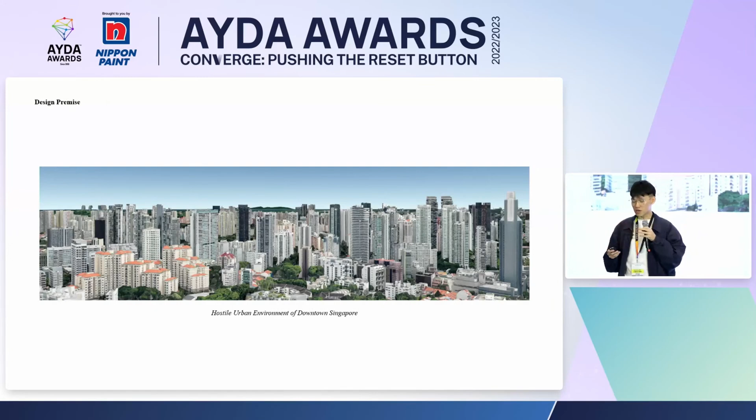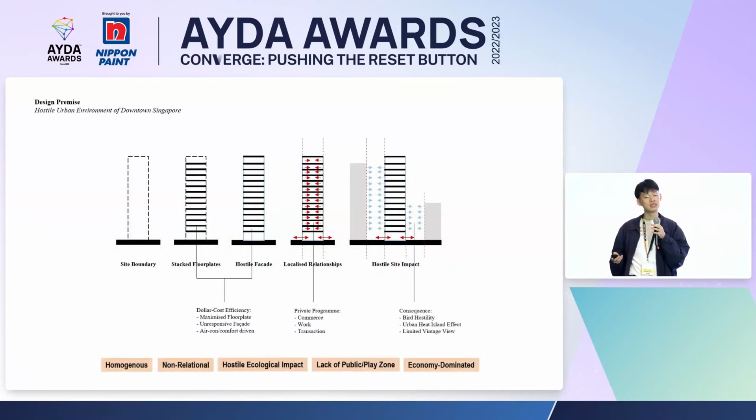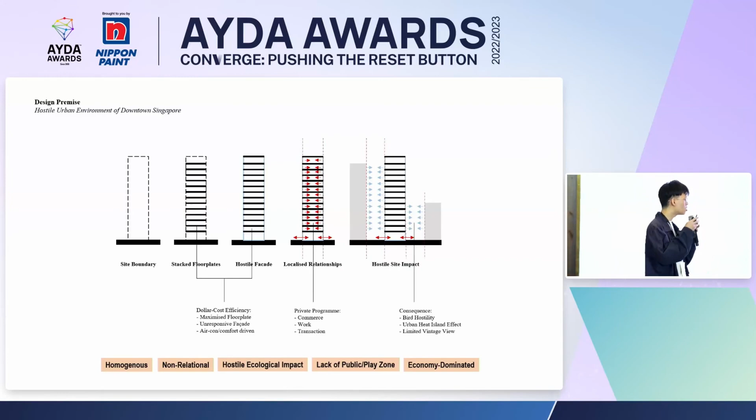In Singapore, the effects of rapid urbanization are very prominent. This project opposes the increasingly hostile urban environment of downtown Singapore, where transactions and work dominate as the anchor programs of our city landscapes. Usually, towers are designed for dollar cost efficiency by maximizing floor plates, resulting in a homogeneous, non-relational situation, a hostile facade causing ecological impacts, and a lack of public zones.

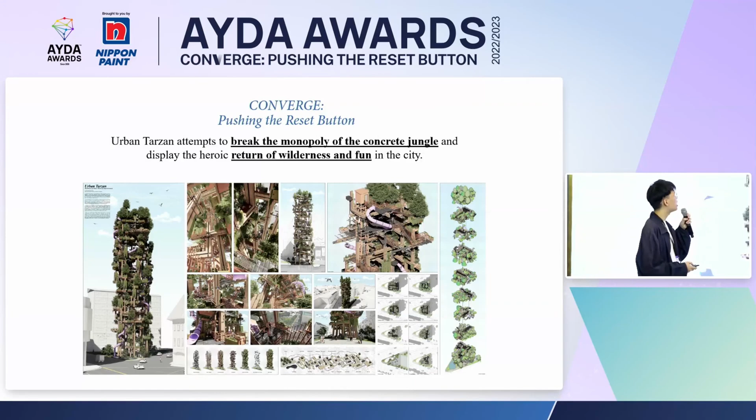My project, titled Urban Tarzan, attempts to break the monopoly of the concrete jungle and display the heroic return of wilderness and fun in the city. For context, the project is located in a cultural/commercial district of around 124 square meters, the size of 1.5 badminton courts, technically less than half the size of this room.

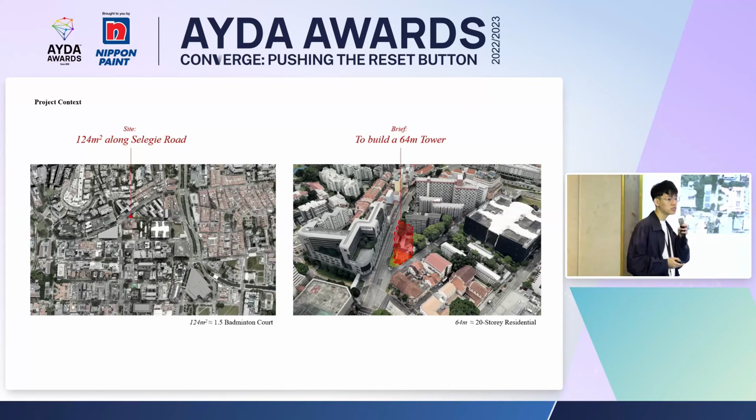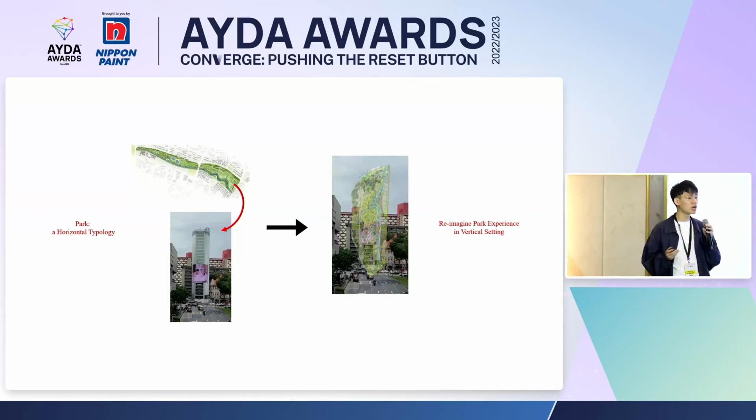The project is to build a 64-meter tower. Urban Tarzan also challenges the park typology, which is usually flat ground on the ground floor, into a vertical setting where we can reimagine park experiences, bringing wilderness, bionomics, and freshness into the urbanscape.

So what actually constitutes designing a nature park? I did a case study of one of Singapore's nature parks and summarized it into three key categories: the ecological system, climate response, and trail creation.

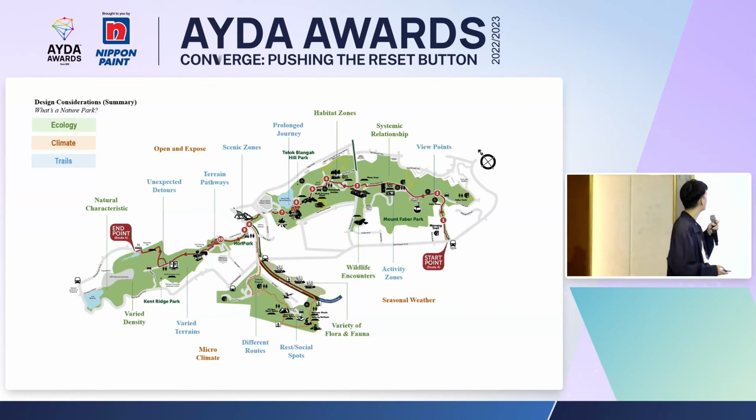The final iteration was chosen because of its spatial provision, structural efficiency, and emulation of nature.

Once the form was decided, I went through an iterative, constant feedback loop where I turned the form into a structure, into space with circulation, and a program. Every time a single change is made, it goes back right to the start to ensure the entire design flow develops throughout.

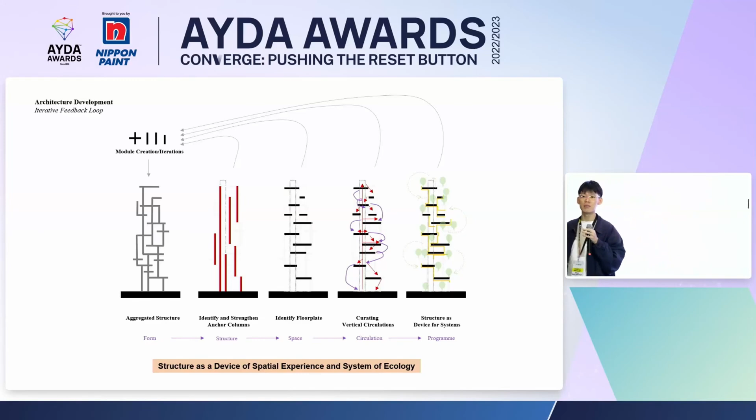This turns columns, which seem to just be a structural element, into a device of spatial experience and a system of ecology. A 1:50 model was made to test the physics and practicality of the building, to see if it actually stands.

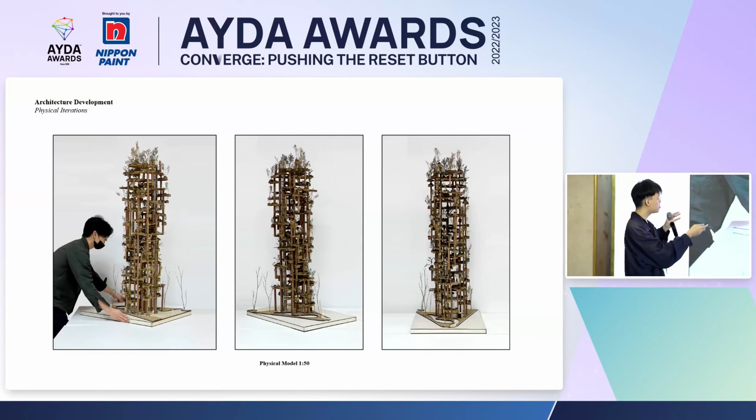When building this model, I had a lot of difficulty because every single time I tried to put in something or glue something, the whole thing might just topple over. This whole process of making the model took more than two weeks.

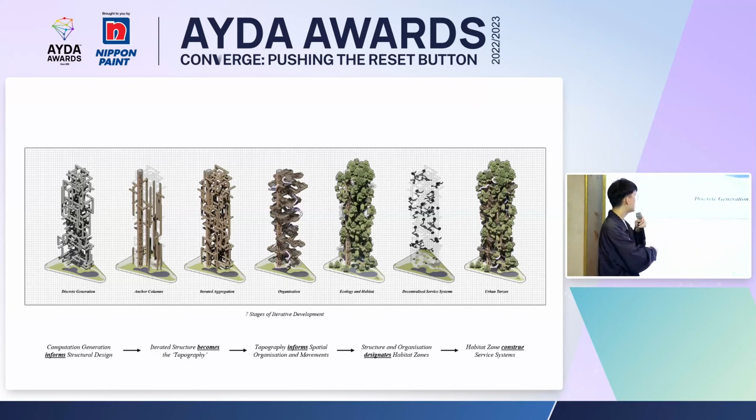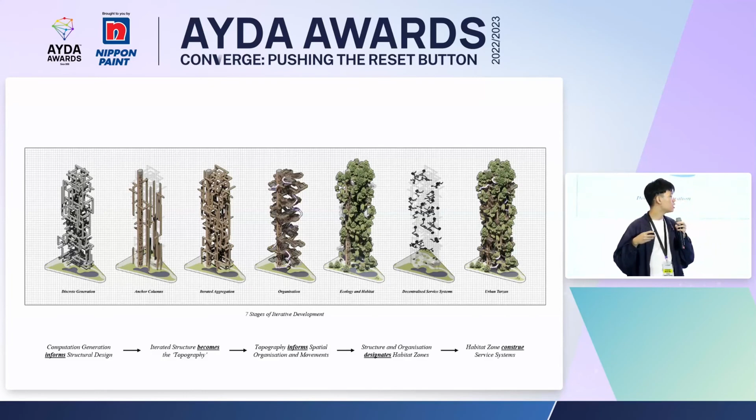In summary, these seven diagrams show the design stages where the computation generation informs the structural design. The iterated structure becomes the topography, and like a real park, the topography informs the organization and movement of the routes, which influences the designation of habitat zones and the construct of the service systems.

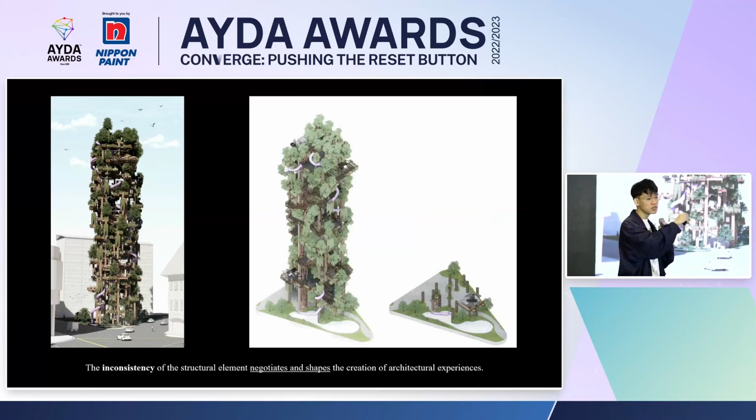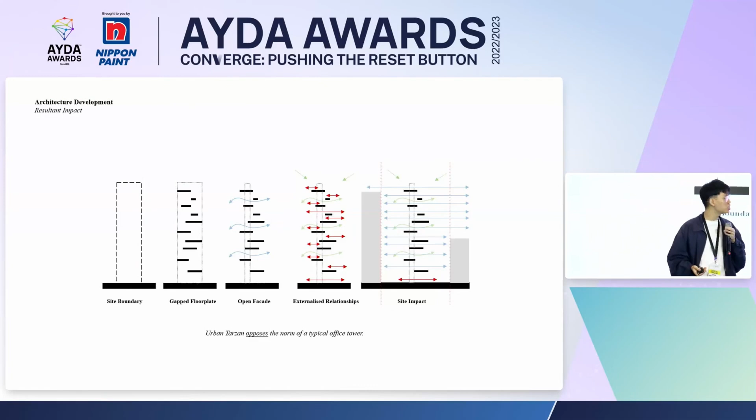A few analyses and studies were conducted, such as the volumetric climate study, where the volume of the site is broken down into 1 meter square cells each to understand where the better spaces are put in functions of programs. Circulation typologies and vantage points were also studied to understand how we can curate the spaces within Urban Tarzan.

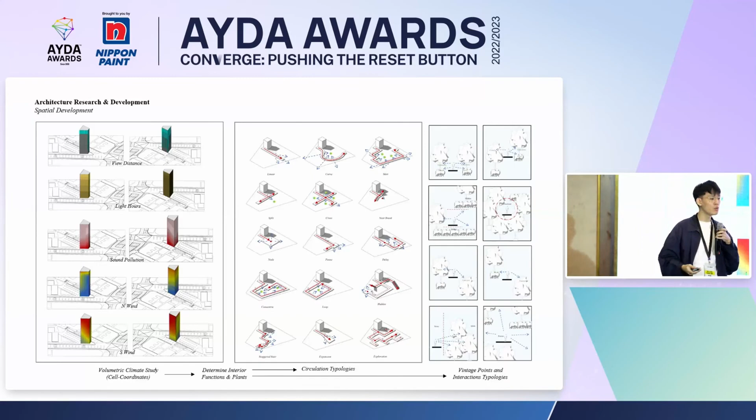Singapore also has a lot of migratory birds that transit through the city throughout different seasons. Most of us do not know that there are actually a lot of bird collisions in our downtown city because of the hostile facade, the glass facade - the birds can't tell where they are flying, and sometimes you'll just see dead birds lying on the floor. This gave me inspiration to create this oasis for them.

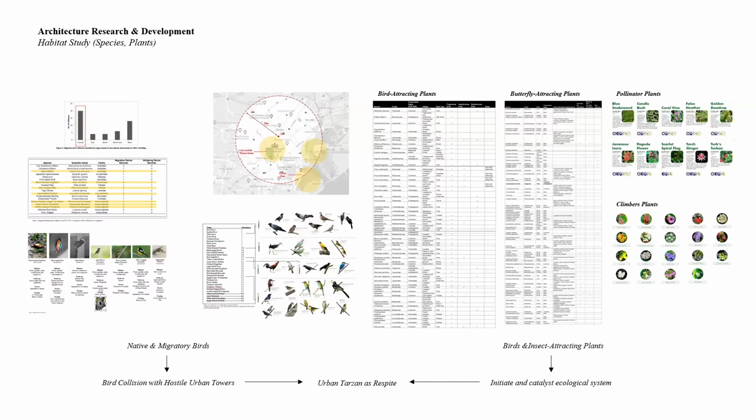Birds and insect attracting plants were also studied and selected, where this initiates and catalyzes an ecological system in hope that Urban Tarzan can become a respite for them.

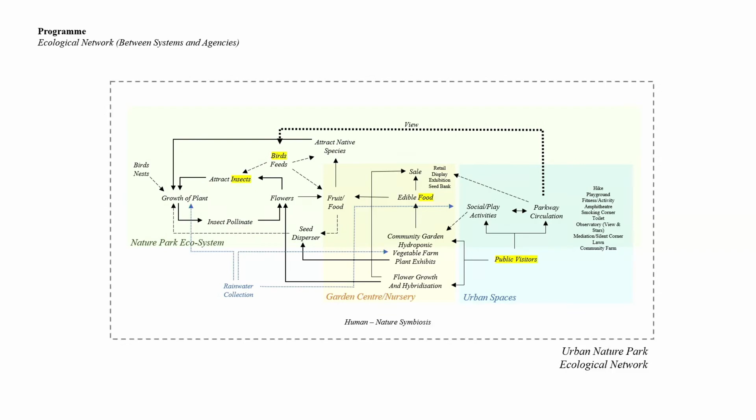In summary, Urban Tarzan has three key realms: one, the nature park; two, as a public space; and three, as a garden nursery. Combining all three together, this attempts to form a circular ecological network where the different functions complement and supplement each other to create this human-nature symbiosis.

In terms of floor plans, you can tell that there are no typical floor plans where the circulation path dances around the columns and beams, and the floor plates are fragmented all throughout.

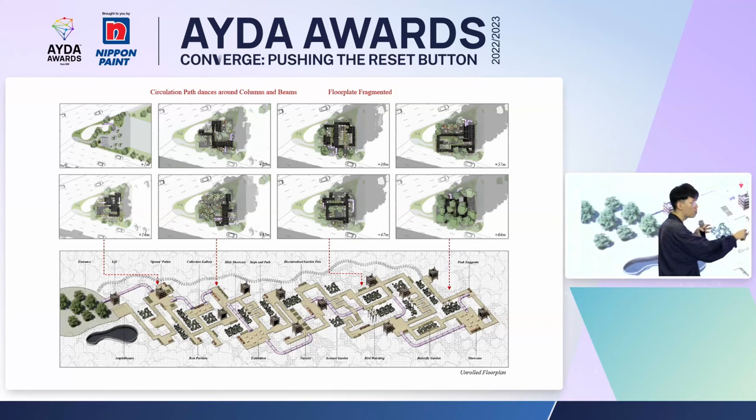After I placed the route of movement inside the building, I unrolled it like a map, the way you'd see when you go for a hike, and it forms this diagram here. You can tell the different typologies of spaces that you can experience throughout your whole route. Not only that, the lift that goes out appears in different parts of the park, so every time you visit Urban Tarzan, you can start somewhere new.

In a three-dimensional sense, Urban Tarzan emulates nature from forest ground, canopy and understory, and emergent level. Human activities are usually located on the ground, on the lower part of the floor due to noise consideration, and the upper part of the building focuses more on creating a safe haven for other species.

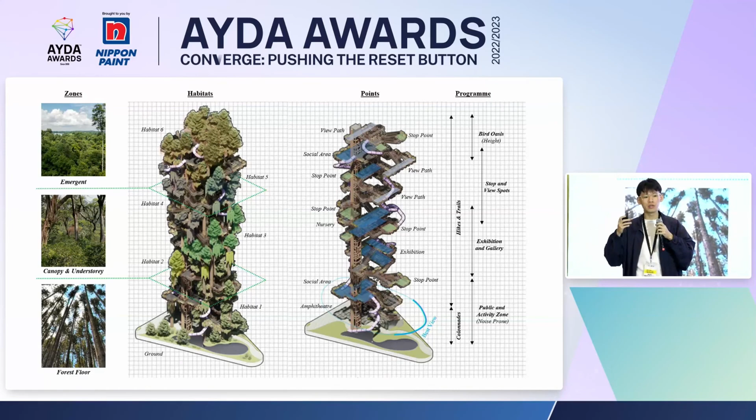Urban Tarzan is constructed through a kit of parts system, and the key goal is to minimize embodied carbon and maximize maintainability. Most of the components work in a modular system, and I summarize these three components: number one, the use of composite timber coming in sizes of around 8 meters and 6 meters, for ease of delivery.

When they are bonded together with steel plates, it creates this type of rail that allows other components such as the rails, railings, and planter box to slide in like a rail system for placement, and also to be removed or swapped for maintenance or reorganization. So every 10 years or so, when a developer wants to refresh the experience, they can just swap the materials and components out to create this refreshed experience.

Not only that, there were also different rainwater harvesting pods placed all around the columns, creating a decentralized service system where rainwater can serve as the irrigation system for the plants, and this works through gravity without the need for any pumps.

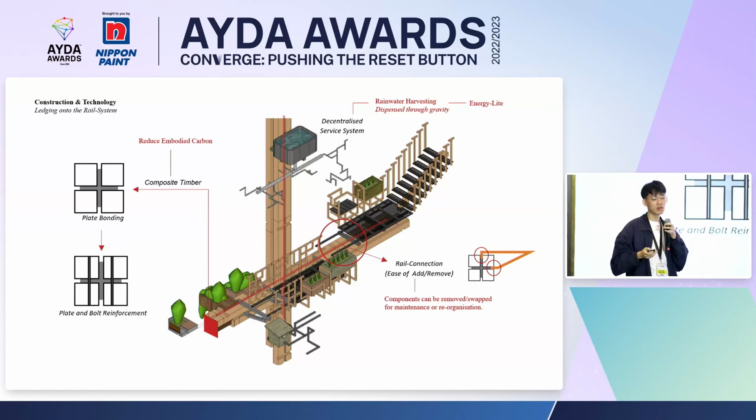Urban Tarzan uses different shades of nature tones to bring respite and tranquility to the city. This opposes the surrounding sites, where most of the concrete jungle comes in dark colors, gray colors, or just glass. This allows Urban Tarzan to bring comfort and balance to the totality of the urban scape. Bright color slides also evoke emotions of excitement and joy.

Urban Tarzan is a very porous building, and this allows the climate and sun to penetrate deep into the building, and also allows birds and species to fly through the building while minimizing collision.

Here you can witness how the circulation path dances around the beams and columns to create detours and slow down people as they move up or down Urban Tarzan.

Slides in Urban Tarzan work like a teleportation device. Every time you go to a park or nature park, you have a destination you want to reach, but you have to physically walk there for 10 to 30 minutes. Here in Urban Tarzan, because of the verticality, you can go into the slides, and within 10 seconds you'll have a refreshed experience somewhere new.

The planters and seeds are integrated with the railing system to allow users to take charge of the nursery, as well as allow users to rest when they need to.

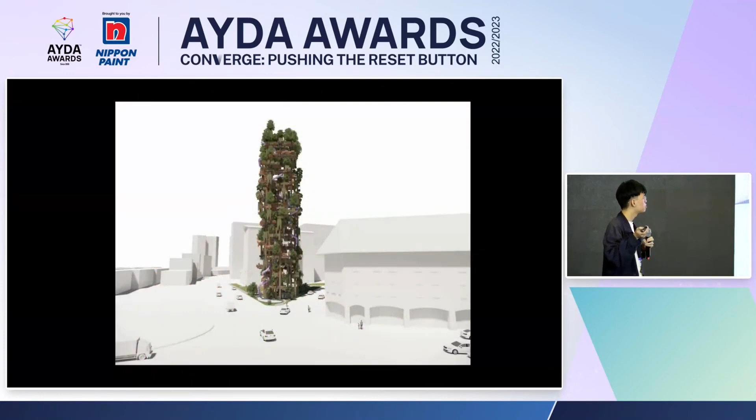Here you can see users walking into the building, into the tower. The human activities here are on the ground floor. On the left you can see the amphitheater, and the lift on the right. You can see that Urban Tarzan grows up from the root high up to the sky.

Here you will see this video of how it feels to take the lift up through the entire building, and you can see that things change almost every second.

The walk inside the park, some of the nursery shots, and the slides. Plants are created based on the circulation path. And the view out to the city.

The high, all-encompassing ceiling, and the top layer, which is a lot denser, creates this oasis for the species. And finally, the front elevation of Urban Tarzan.

In conclusion, with respect to this year's theme, Urban Tarzan seeks to revitalize leftover sites, bring people, architecture, and natural ecology together to live in a symbiotic manner, and also to bring nature closer to home.

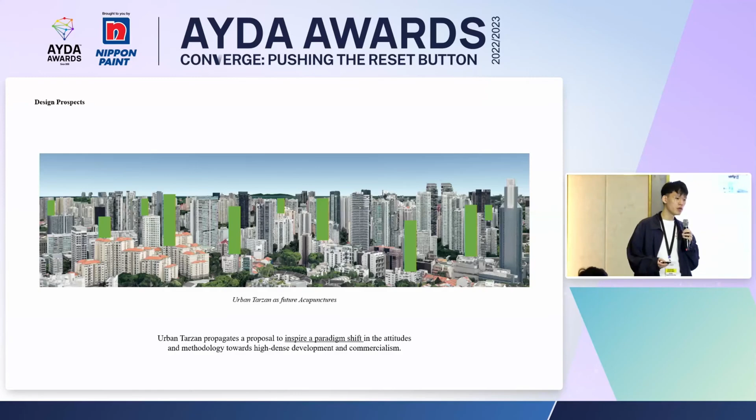Urban Tarzan hopes to propagate a proposal to inspire a paradigm shift in the attitudes and methodology towards high-dense development and commercialism, in hope that in future, Singapore will be able to see high-rise development as more than a product of commercialism. Thank you.